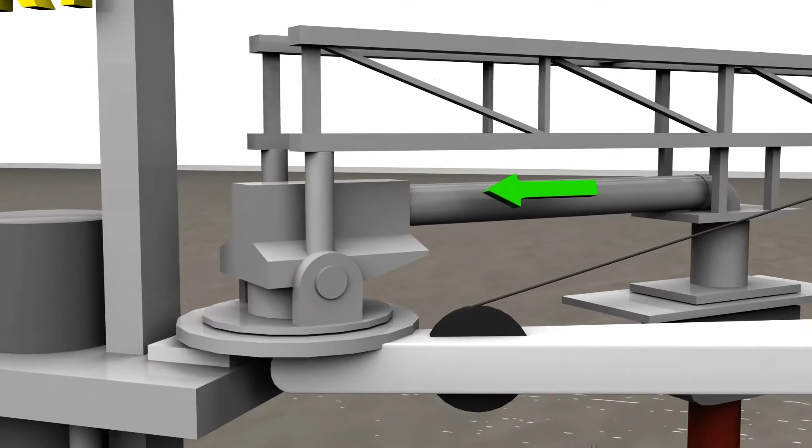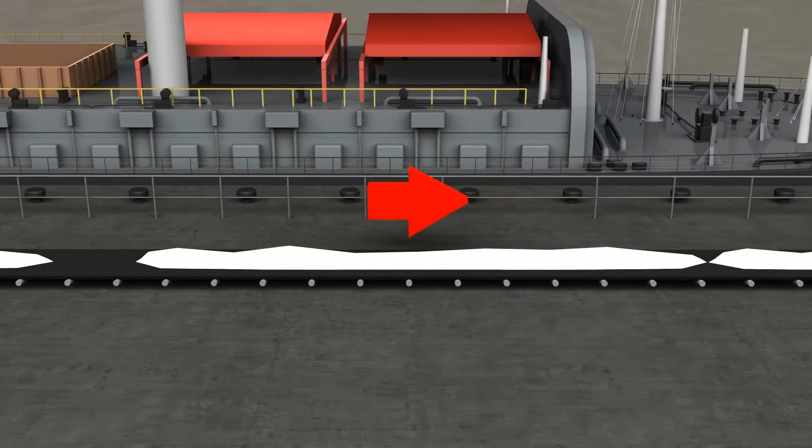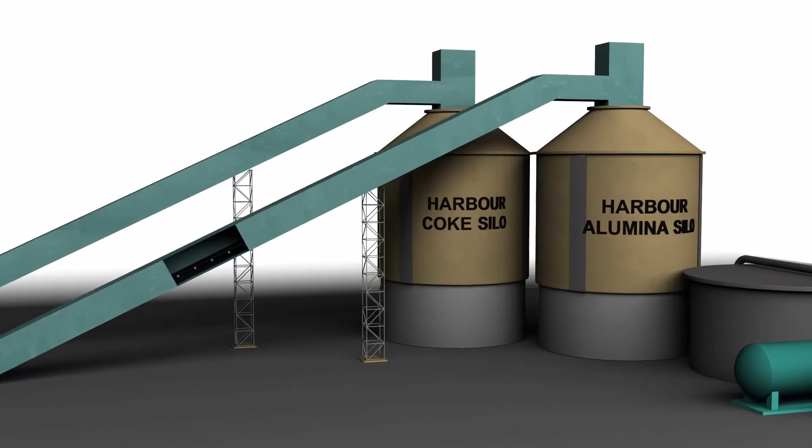Alumina and coke are transported to silos at Hillside Smelter some 5.4 kilometers away by conveyor belt. The liquid pitch is transported to storage tanks at Hillside by road tanker.

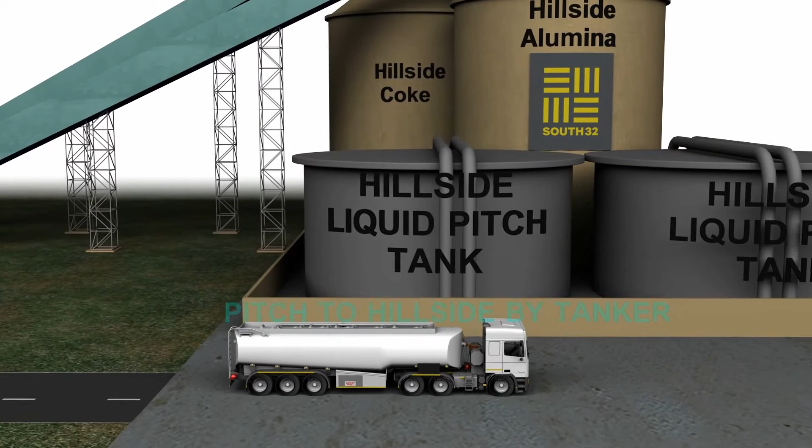Aluminium is produced by electrolysis, and carbon anodes are an essential part of this process. Anodes are made in the following way.

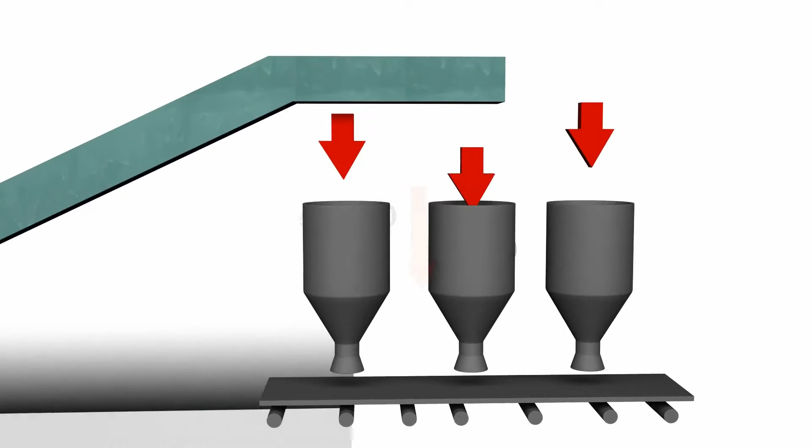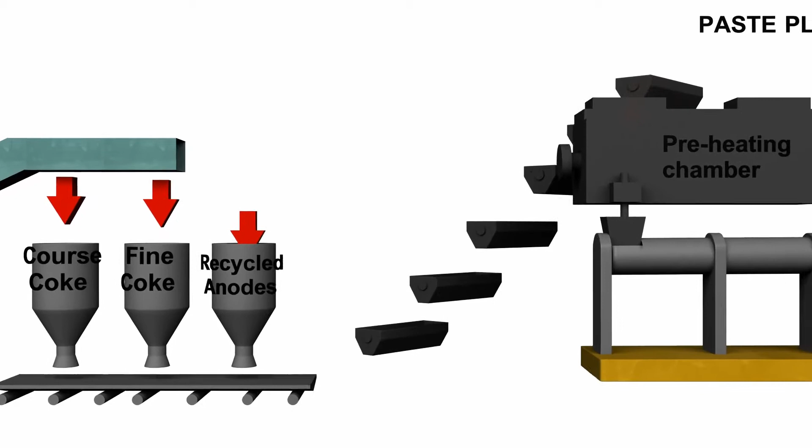Coke enters the paste plant, where it is sorted, graded, and blended with spent anodes, which have been crushed for recycling. The coke mixture enters a preheating chamber via a bucket elevator, after which it is transferred to the Buss mixer, where it is thoroughly mixed with liquid pitch to form a paste.

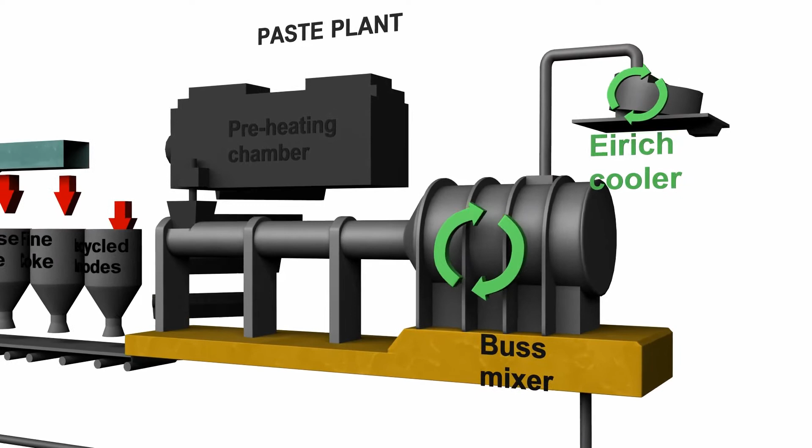The paste now enters a second mixer, the Eirich cooler, where the temperature is lowered as the mixing process continues. The paste is now ready for molding into anodes in the form of large blocks, approximately 1.5 meters by 0.6 meters by 0.6 meters.

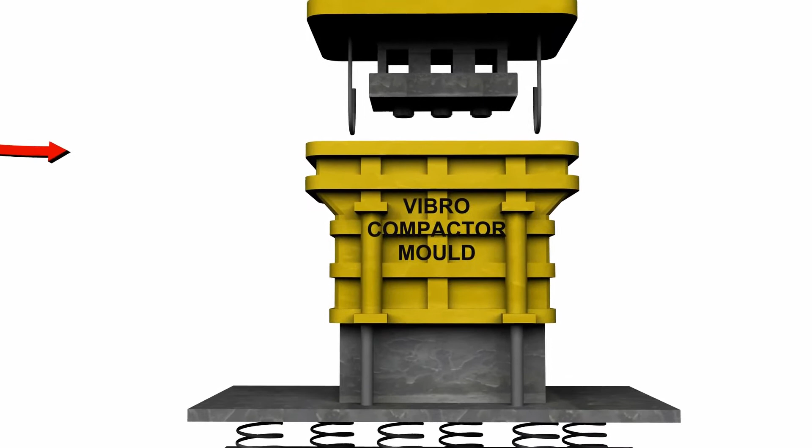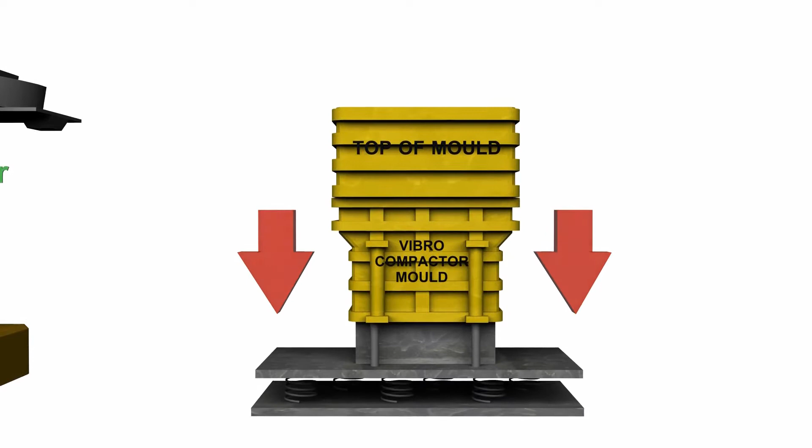The process takes place in the Vibro compactor mold. The top section of the mold then descends, exerting enormous pressure onto the paste mix within the mold. At the same time, the mold is vibrated, which facilitates consolidation of the coke particles within the mixture.

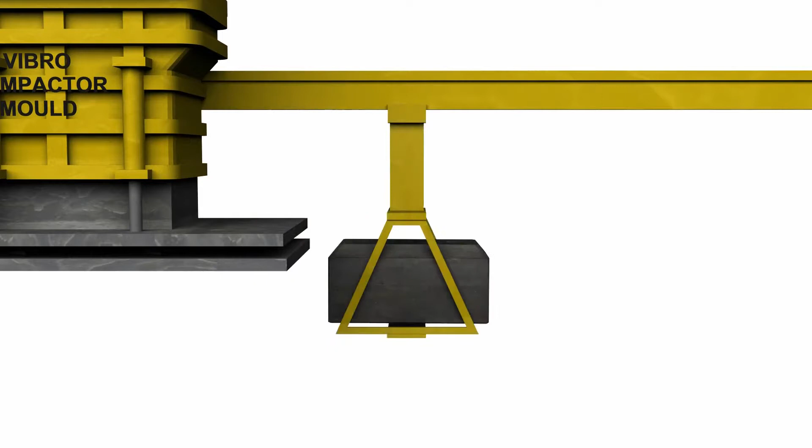At the end of the process, the mold and the base separate, the anode is ejected and passed through a cooling tunnel where it is sprayed with water.

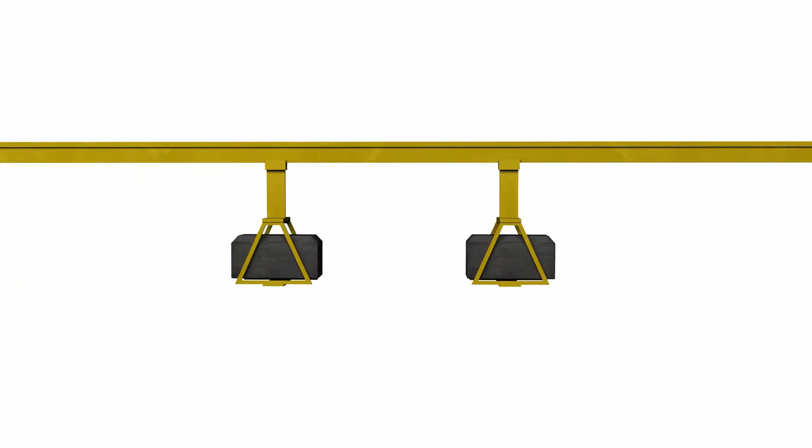The green anodes, as they are termed, are now ready for baking, a process which imparts strength and improves the electrical properties.

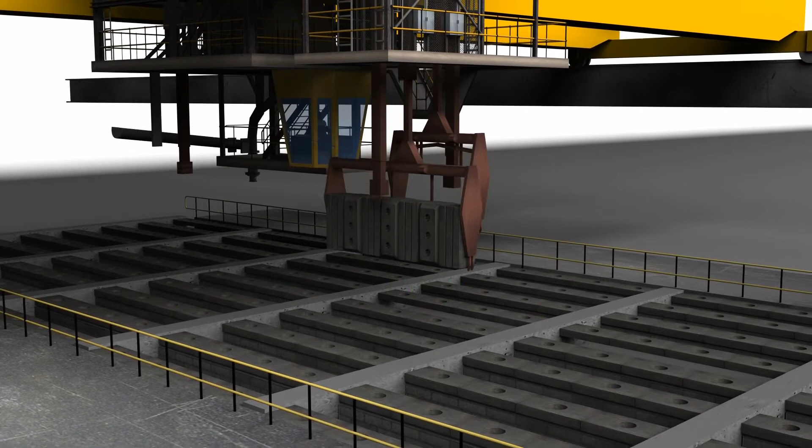Anodes are turned into a vertical position and placed 3 deep and 7 across in a gas-fired baking furnace. Baking takes approximately 20 days, gradually heating the anodes to a temperature of 1100 degrees Celsius, then cooling them slowly

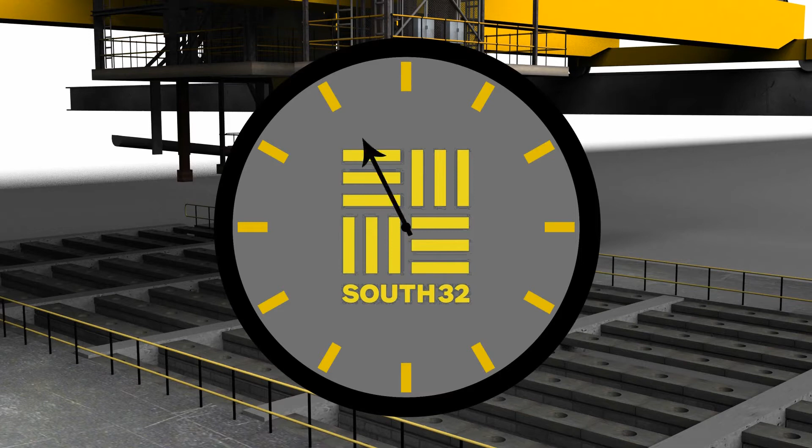and evenly. Fumes from the bake furnace are treated at the Fume Treatment Center, FTC, to remove dust and other impurities, such as fluoride and tars, by adsorption on alumina and by condensation.

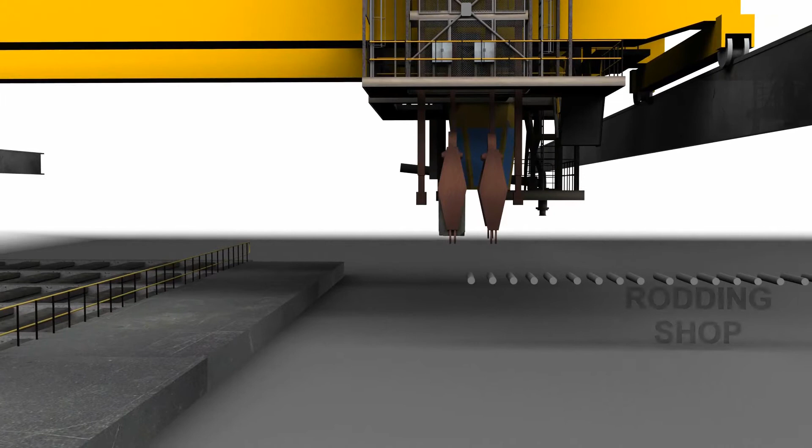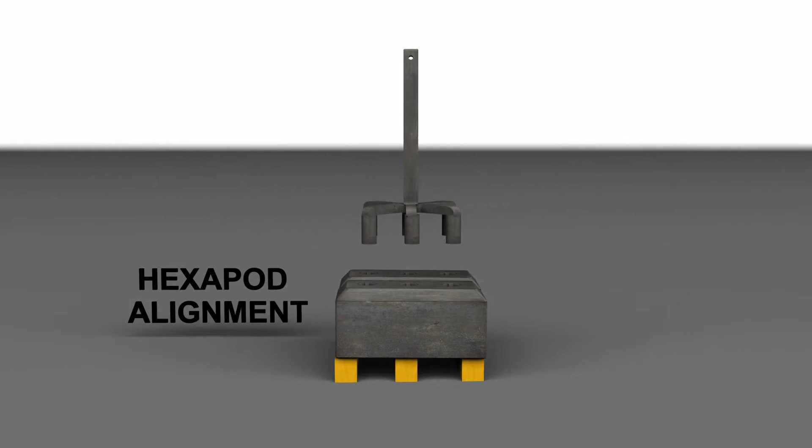The baked anodes now enter the rodding shop, where anode stem attachment takes place. The anode stem is an electrical conductor consisting of an aluminium rod welded to an iron hexapod.

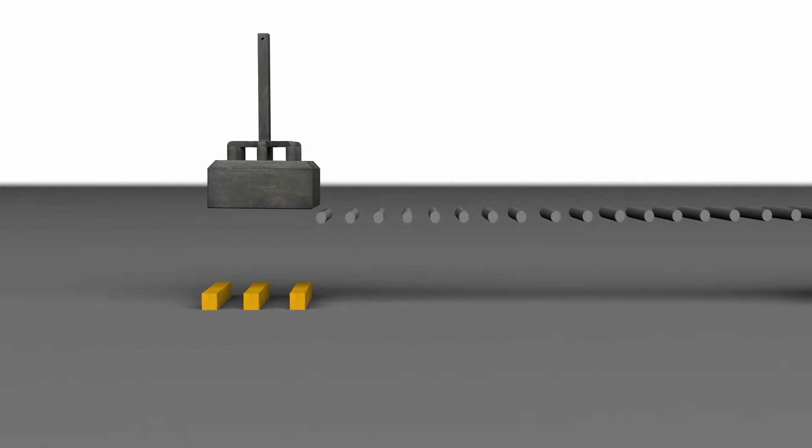Each hexapod, meaning 6-footed, is automatically aligned with 2 anodes and then lowered so that its feet enter the holes in the top of the anodes, which are then cemented in place with molten iron.

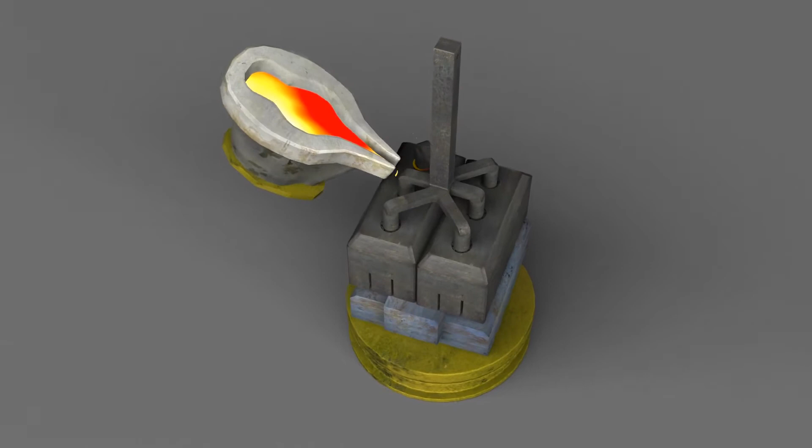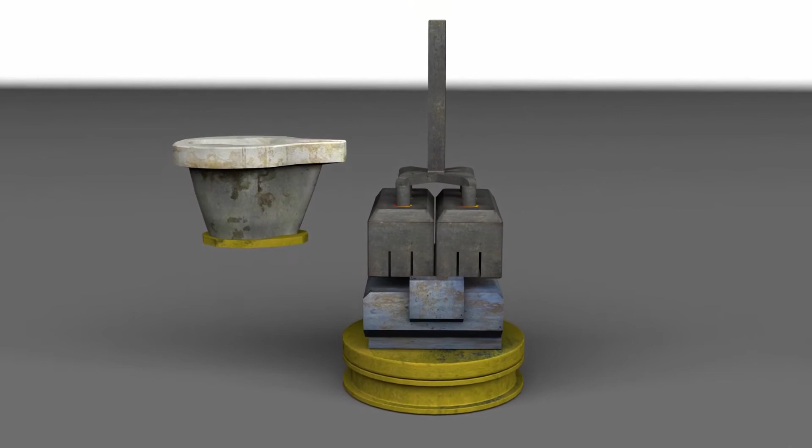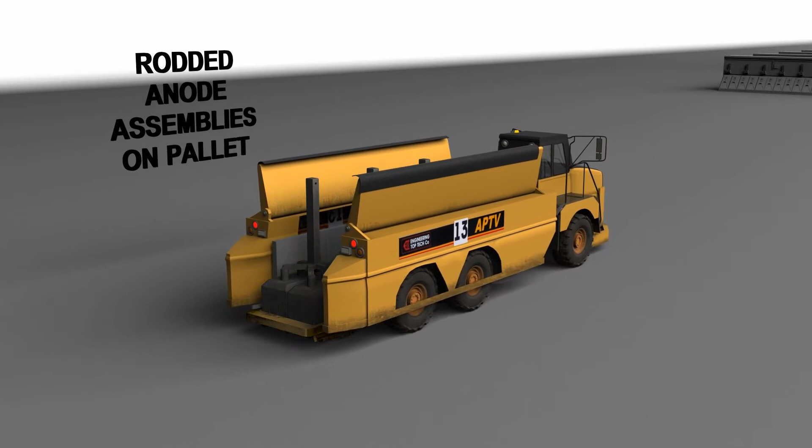Rodded anode assemblies are now conveyed to the reduction plant by means of a special vehicle known as the Anode Pallet Transport Vehicle, APTV.

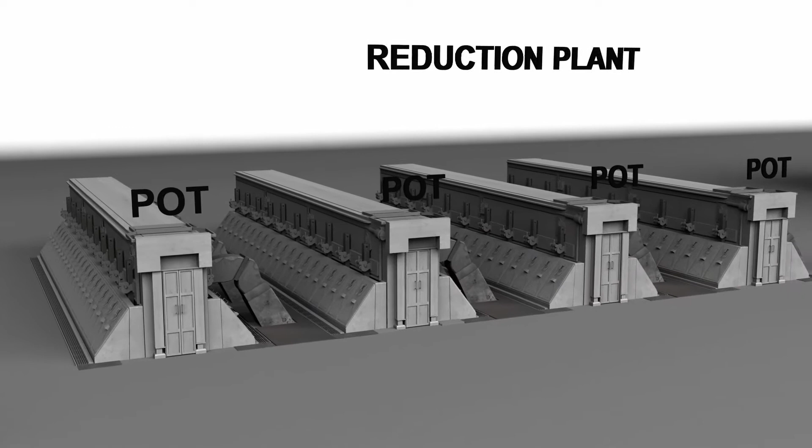Reduction is an electrolysis process whereby fluorinated alumina is converted into molten aluminium in special containers called pots. The electrolyte, otherwise known as bath, contains the ingredients essential to the production of aluminium: alumina powder, aluminium trifluoride, and cryolite, the latter being used as a catalyst, which reduces the melting point of alumina.

The other essential ingredient in the reduction process is electricity, which is fed directly into plant via overhead power lines. Transformers and rectifiers convert the 132 kilovolt alternating current incoming power into 1200 volt direct current, which is connected to the pot line. Each pot line consists of 288 pots connected in series.

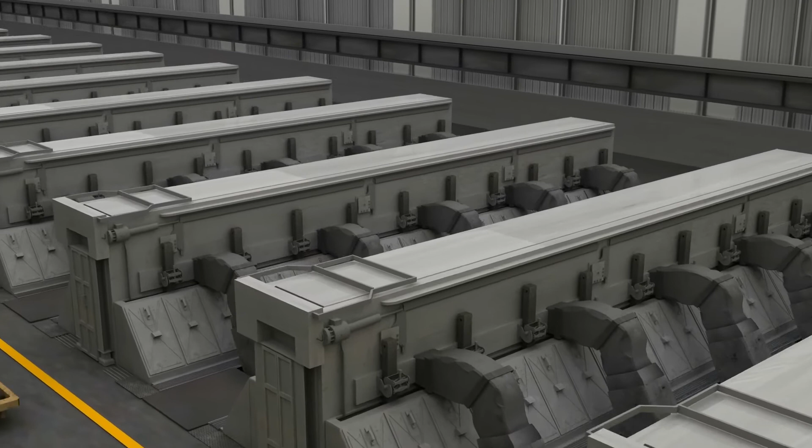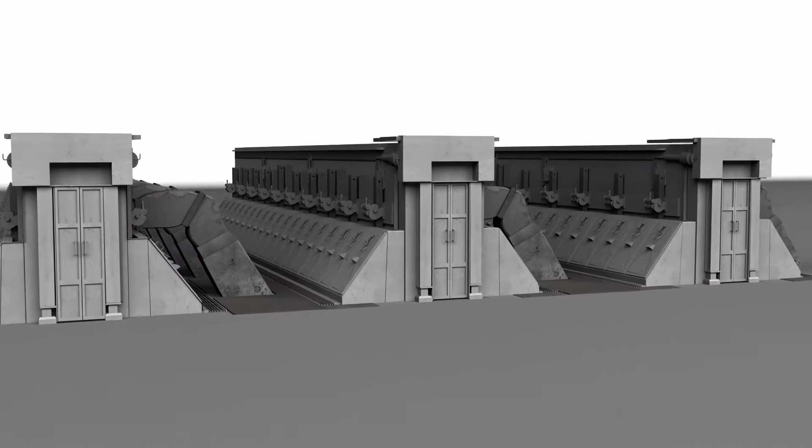Each pot contains 20 anode assemblies and draws a massive 325,000 amps of electricity. The electrical charge passes from the anode through the electrolyte into a negatively charged cathode, situated at the base of the pot. Enormous heat is generated in the process due to the resistance of the electrolyte.

Alumina is reduced to molten aluminium, which collects at the bottom of the pot. The aluminium is siphoned out of the pot into a ladle at the rate of 3.2 tons every 32 hours and is transported to the cast house.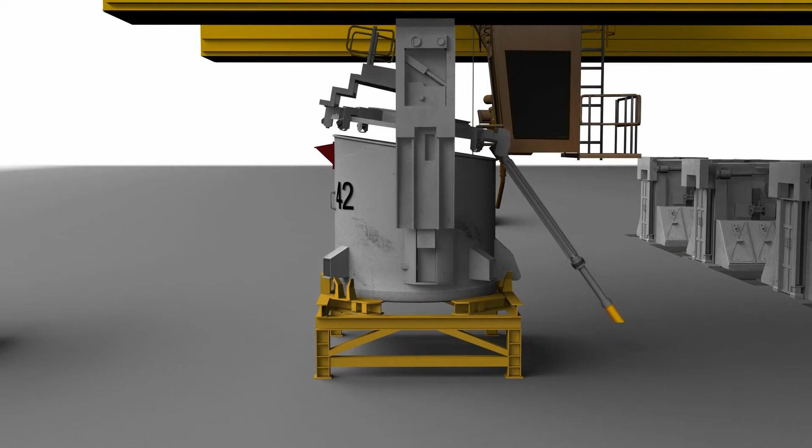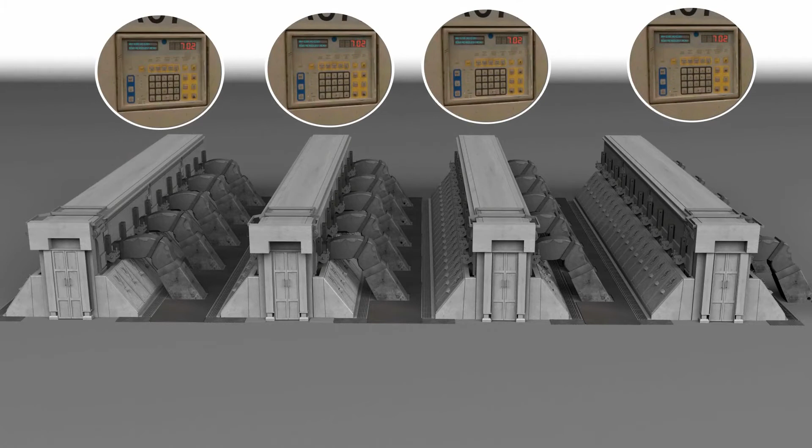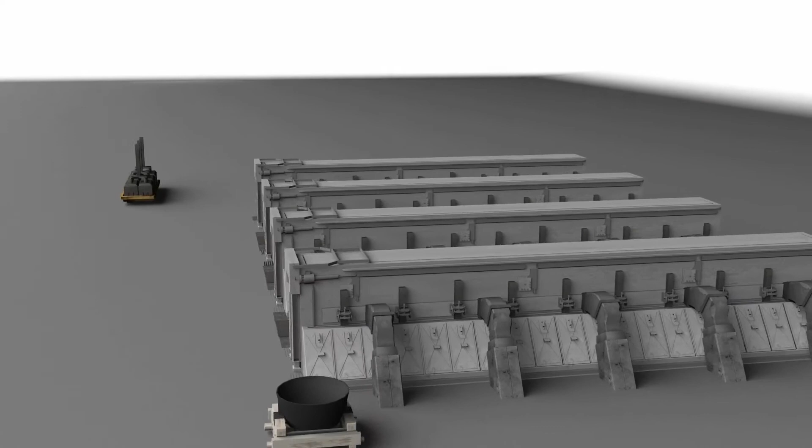The addition of fluorinated alumina during the reduction process is controlled by a computer on each pot. The computer also adjusts the anode beam downwards as the anodes are slowly burnt away during the reduction process. The anodes are replaced every 27 days.

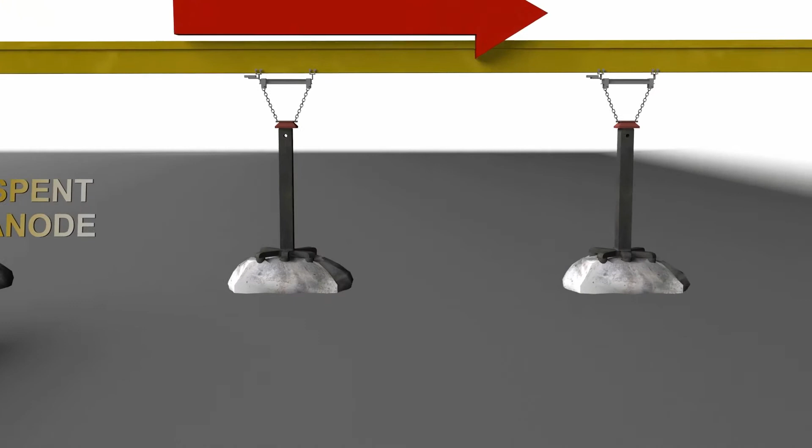The spent anodes, called butts, are taken to the butt crushing plant. Once crushed, the unused anode material is blended with coke in the paste plant for the manufacture of new anodes. Bath, cast iron, and anode stems are also recycled.

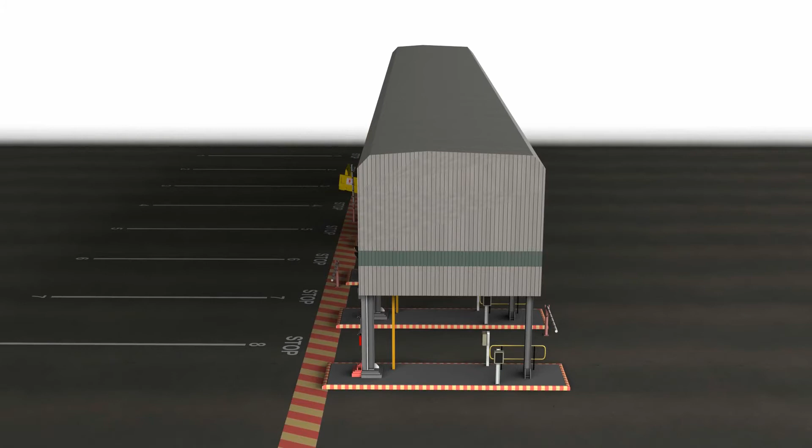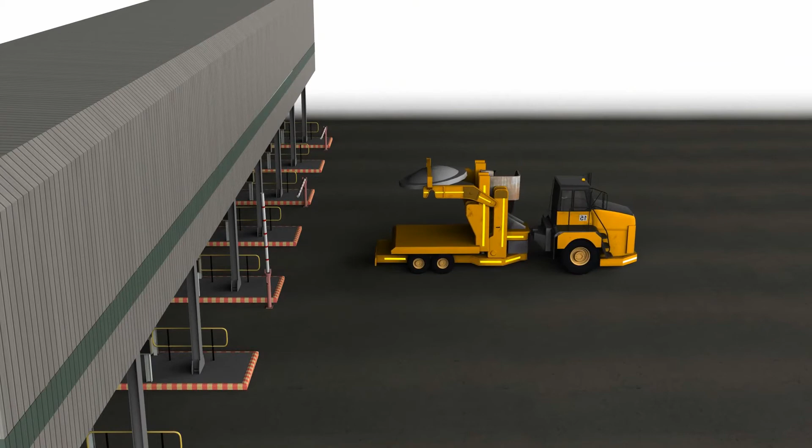The ladles containing molten aluminium are transported on ladle transport vehicles to a weighbridge where the ladles are weighed. The ladles are collected by ladle tilter transport vehicles and taken to the cast house.

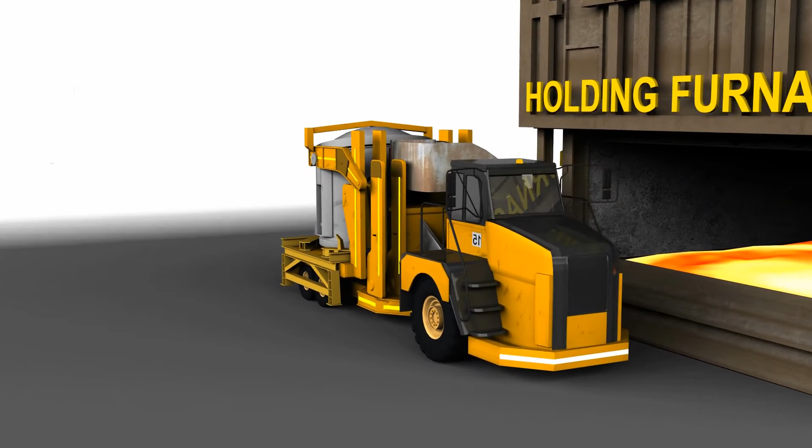The door of the aluminium holding furnace opens. The ladle is tilted so that the liquid aluminium flows into the furnace.

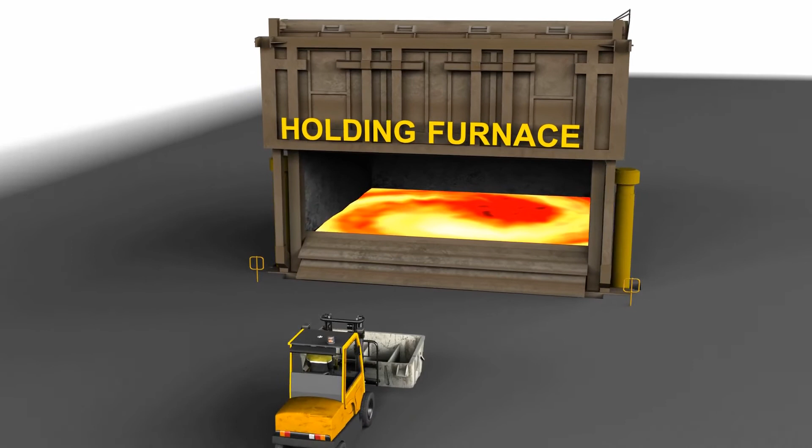The empty ladles are then returned to the weighbridge, where they are collected by the LTVs and taken back to the pot lines. Aluminium in the holding furnace is kept molten by gas burners, which heat the inside of the furnace. Each furnace has a capacity of 60 tons.

The vehicle here is called a furnace tending vehicle and has a skimming tool for removing oxidized aluminium, known as dross, from the surface of the metal.

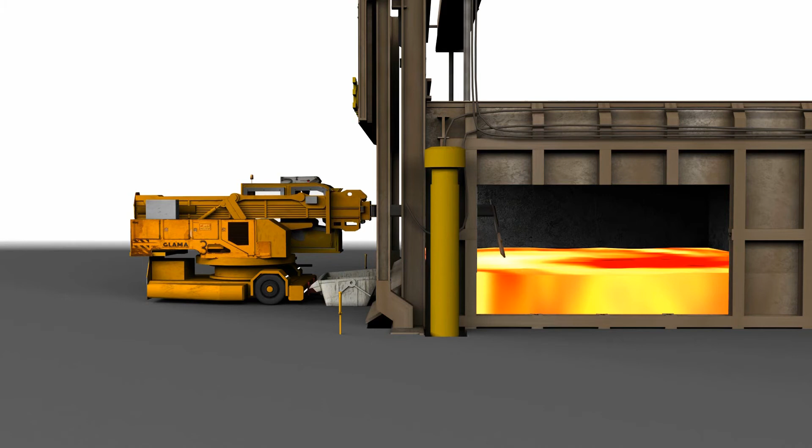Samples of molten aluminium are obtained at this stage using a special spoon and poured into portable molds. These samples are barcoded with batch information and taken to the laboratory for analysis.

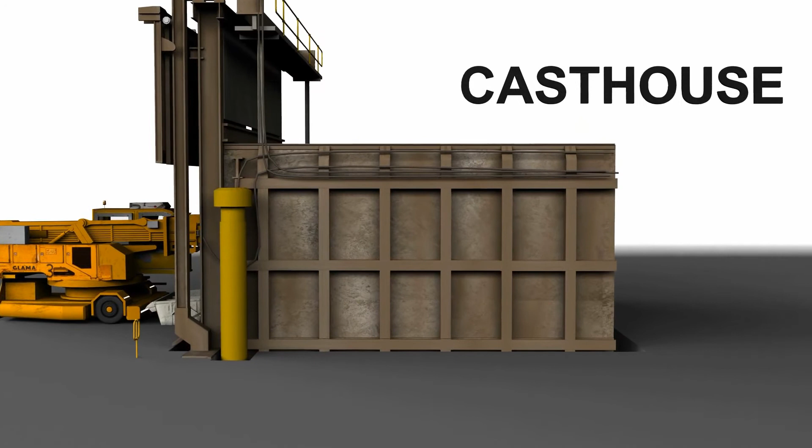When the holding furnace is full, hydraulic jacks tilt backwards and the aluminium runs into a launder, or trough, and flows to the casting wheel.

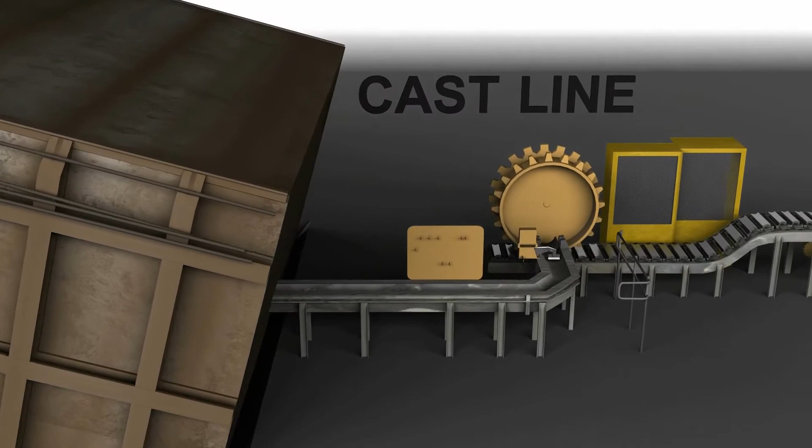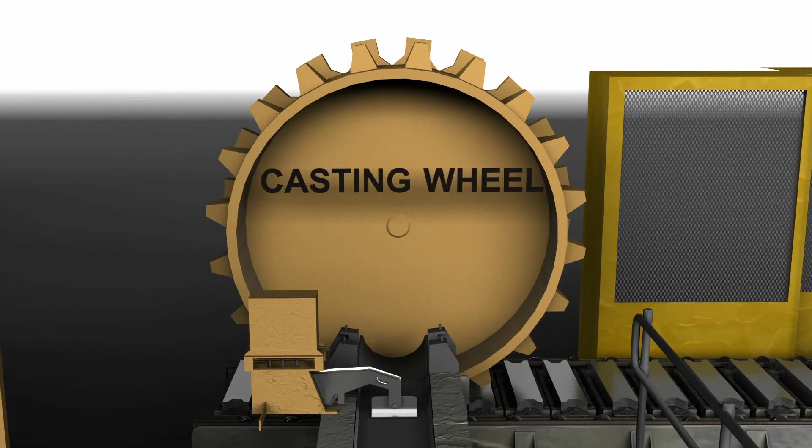Samples are again taken as the metal is cast. The casting device is a wheel, open on one side, with a groove running around its inside circumference, which leads into a series of nozzles placed around the outside of the wheel.

As the casting wheel revolves, molten aluminium runs into the groove and flows into the nozzle at the bottom of the wheel, which feeds into an ingot mold, one of an endless loop of molds, synchronized to align themselves with the descending nozzles.

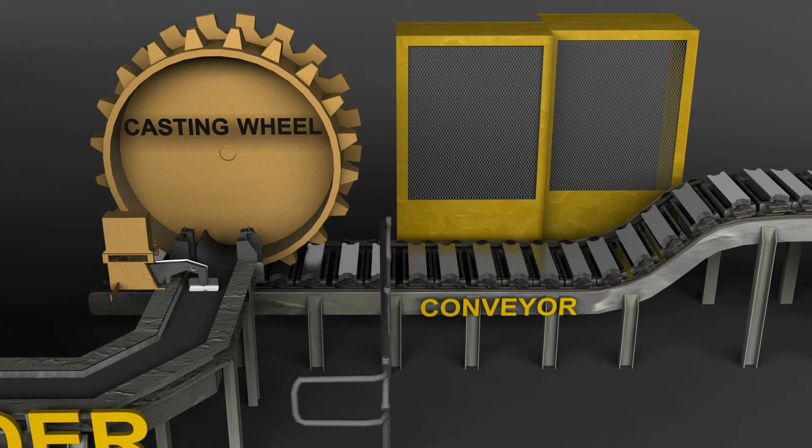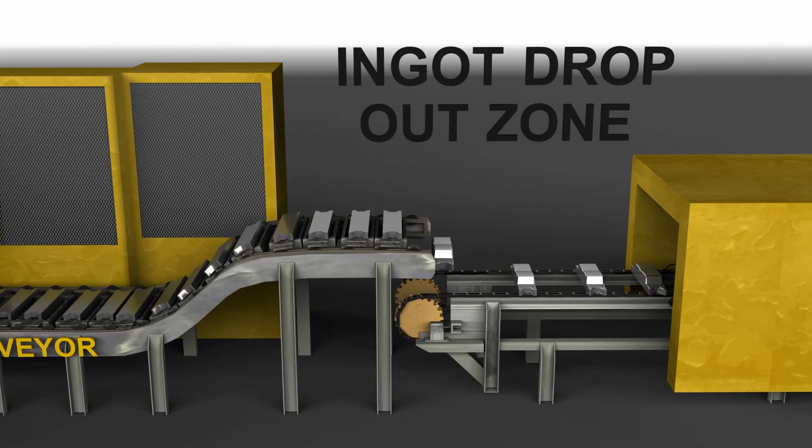The ingots are skimmed before they start to solidify and are transported in their molds to the ingot dropout zone, a point at which the molds are inverted, depositing the ingots onto another conveyor.

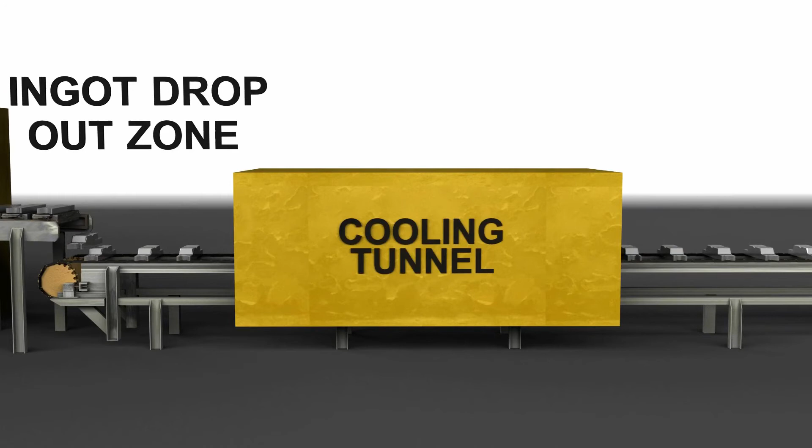Although solidified, the ingots are still extremely hot and now enter a cooling tunnel before they can be handled. After emerging from the cooling tunnel, every other ingot on the conveyor is inverted to ensure that the ingots interlock

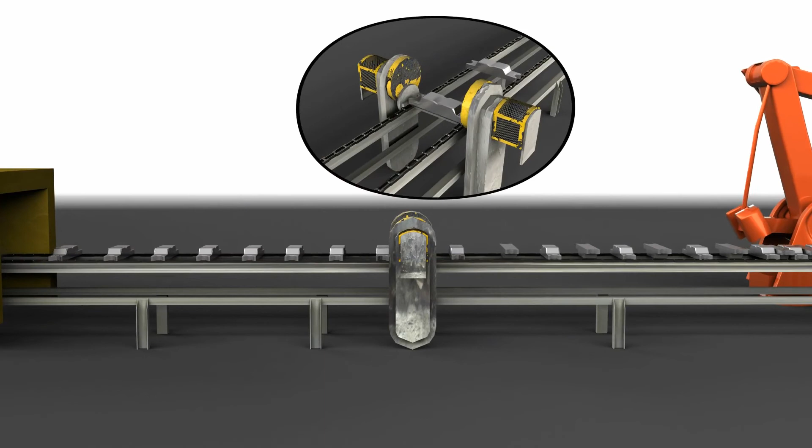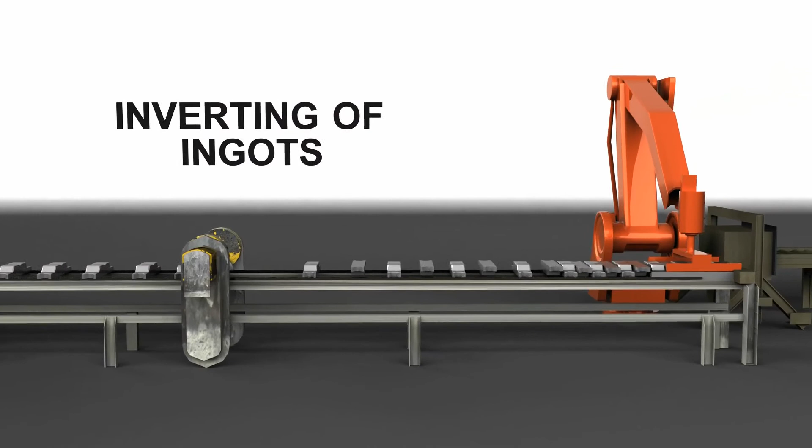correctly when they are stacked into bundles. Stacking is carried out by a pre-programmed robot.

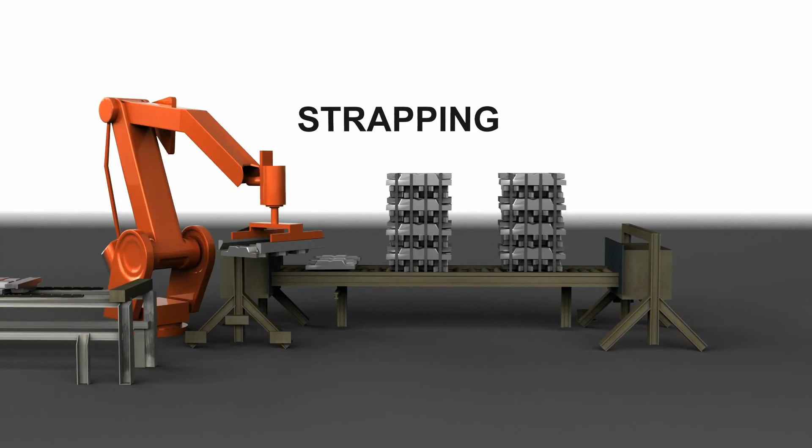Ingot stacks are strapped into 1-ton bundles by an automatic strapping device, and the bundles are loaded by the gantry robot onto a super pack trailer which carries 24 bundles on the short journey to the Strang Rennies Metal Terminal, SRMT, at the harbour.

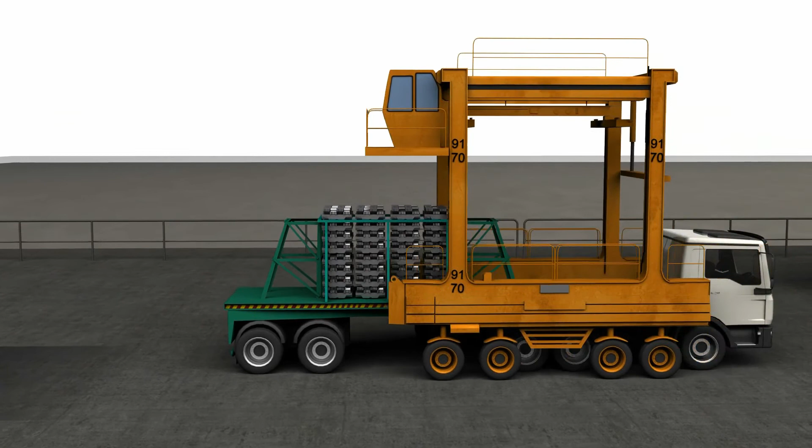At the harbor, a straddle carrier removes the load of ingot bundles from the trailer and places the stacks in a holding area prior to shipment.

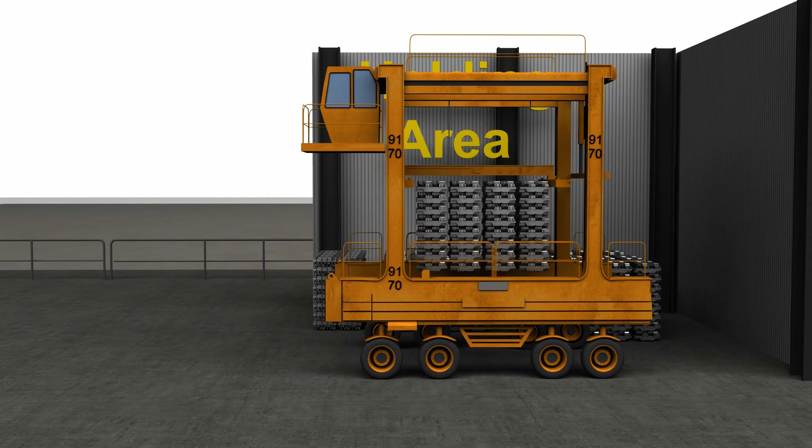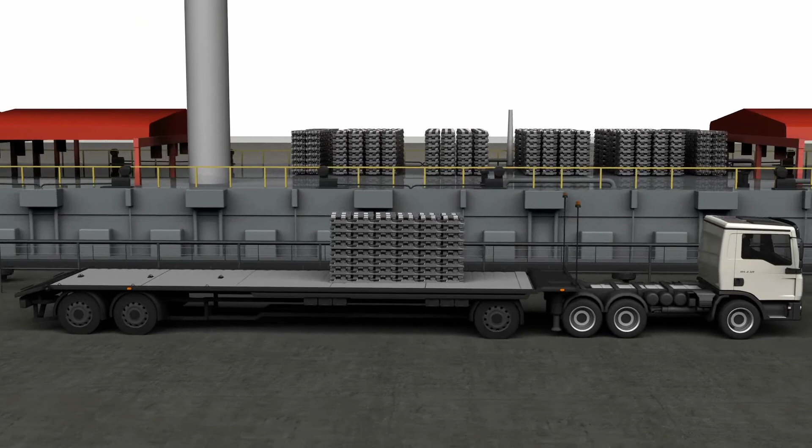Ingot stacks are transported to the quayside on a trailer from which they are loaded for shipment to overseas markets.